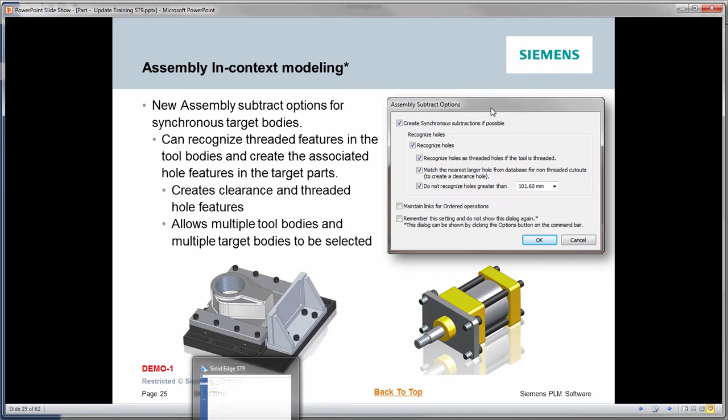So let's take a look at the new assembly subtract options for synchronous target bodies. The new options here, of course, are recognizing holes, and we want to take a look at that. So in Solid Edge, we're just going to open up from the first example here in the 1 through 3 assembly in context, O1 assembly folder. Open up the slider assembly.

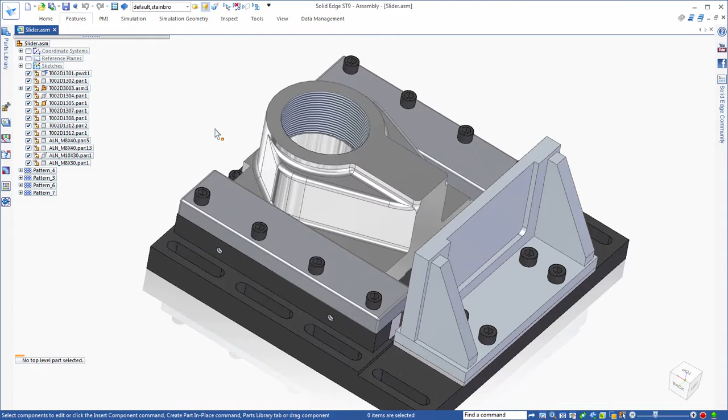So here we have a bracket that's going to hold our hydraulic cylinder. We have the chrome looking slide here. And what we're going to do is bring in that hydraulic cylinder and put it in position. So from the same folder, I'm going to pick up that cylinder and we're just going to position it on the bracket.

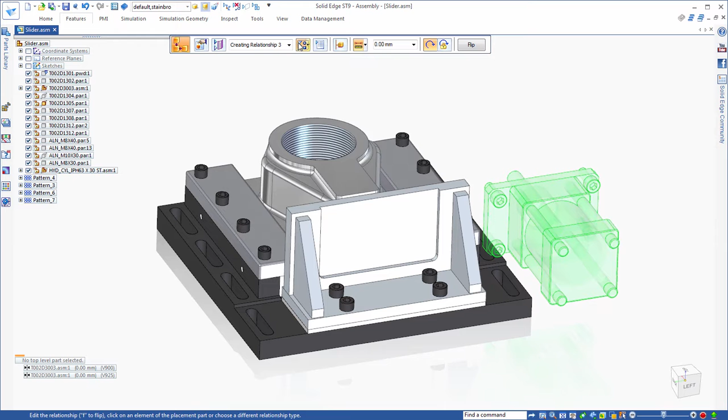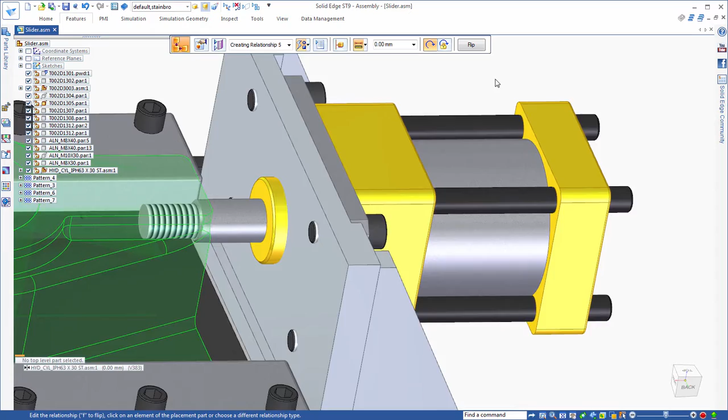And let's use the centering plane here and double offset, centered in the bracket. The other thing that we want to assemble is the slide up against that shoulder on the cylinder. Now notice that there's no hole in the slide. There's also no holes in the bracket. The new functionality then is to actually subtract the cylinder assembly from those other components.

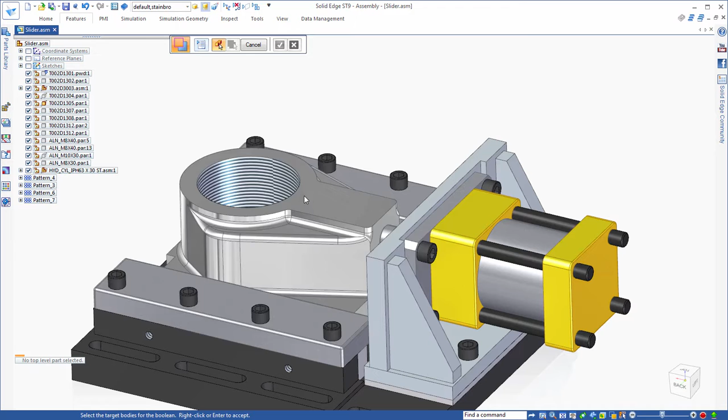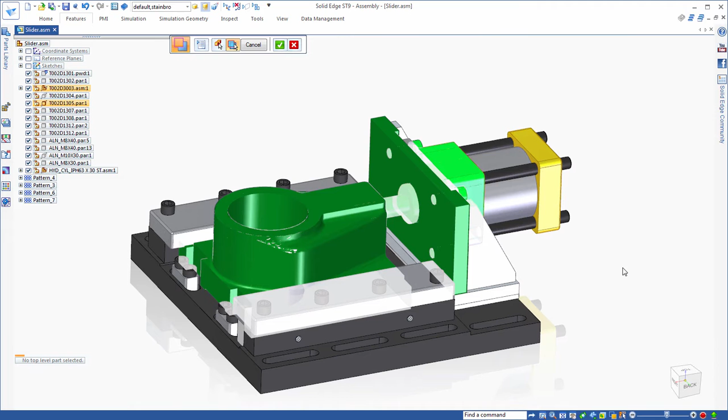So let's go to the features under subtract, and here's the new options to recognize holes. So first we select what our target is, which is the slide as well as the bracket face here. And the tool is going to be, of course, the rod, also the end of the cylinder, as well as the 4 bolts. So once we have all those selected, go ahead and allow it to do that subtraction for us.

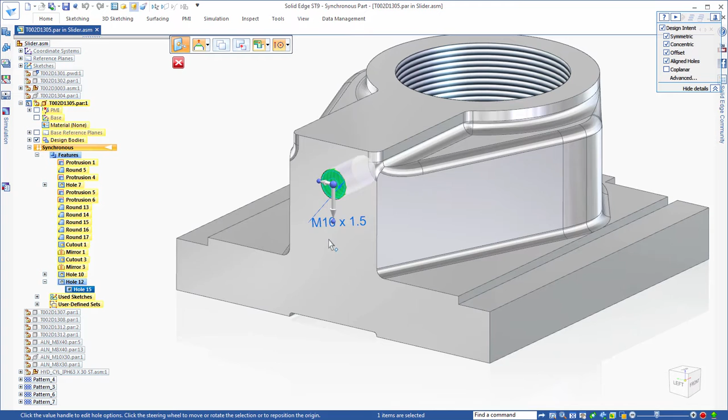What's cool about that then is if I go into the slide and I take a look, we do in fact have a tapped hole in our slide. In fact, it's a hole feature that I can go in and edit. So let's go ahead and do that. Right now it's just a blind hole.

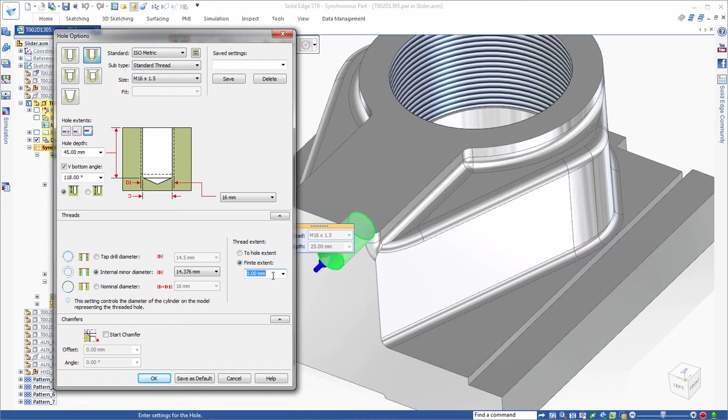What I want to do is actually put a tap drill in there with it. So we'll go into the options here. We'll change the options to include the V bottom. Hole depth will make it deeper, and then we'll tap it just to say 35 millimeters deep. And now we've updated that hole information in that part. It's in the right position because it was subtracted, and that's exactly what we want.

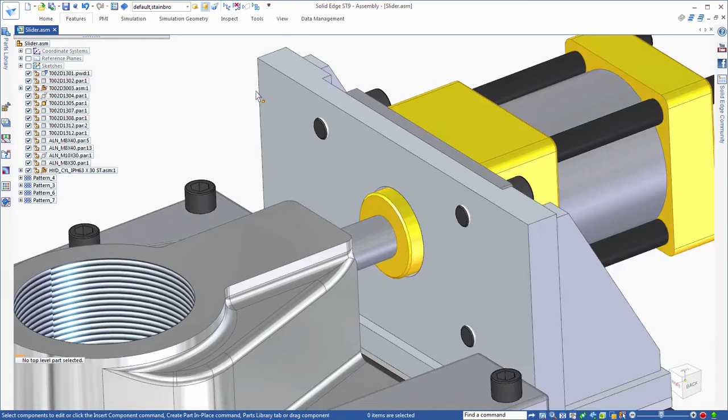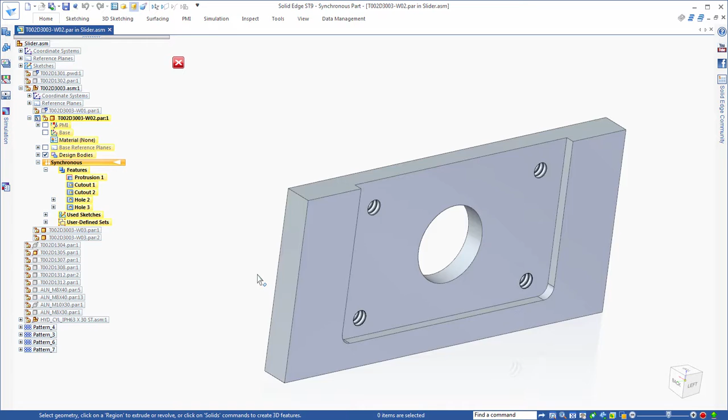Let's take a look at the bracket face. If we look at the bracket face, you can see that there's clearance between the front of the cylinder and the bracket, and that's because we told it to make that a hole, and it recognizes that it needs to be clearance. So let's go ahead and edit that plate, and there you see the 4 tapped holes for the bolts from the hydraulic cylinder, as well as that clearance hole in the middle, all from just the subtract command. So some very powerful new functionality there in ST9.